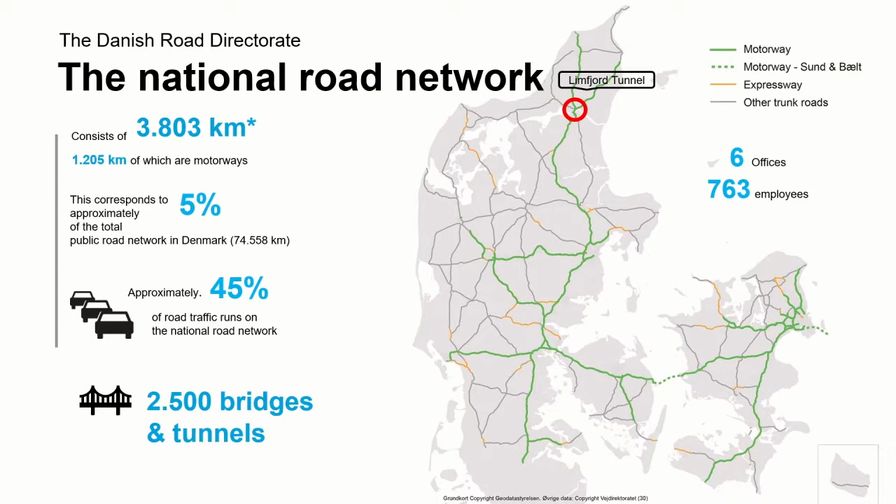Now here we are in the Limfjord tunnel. It was constructed from 1965 to 1969, located in the northern part of Denmark. It's part of the Trans-European road network, and it's a very important connection for traffic to Norway and Sweden. It's an immersed tunnel, 582 meters long, divided into 2 tubes. Each tube is 12 meters wide with 3 lanes each.

Since its construction and opening 50 years ago, the traffic has increased from 29,000 to almost 100,000 cars today, so it's a high use factor. During the 50 years of operation, the tunnel has been equipped with a lot of mechanical and electrical systems, and appears today as a fully automated tunnel. It is operated 24 hours with an emergency preparedness.

If and when we have a failure, the O&M contractor is reached through an SMS, and furthermore it's monitored from the local police station, wherefrom you also can launch restrictions.

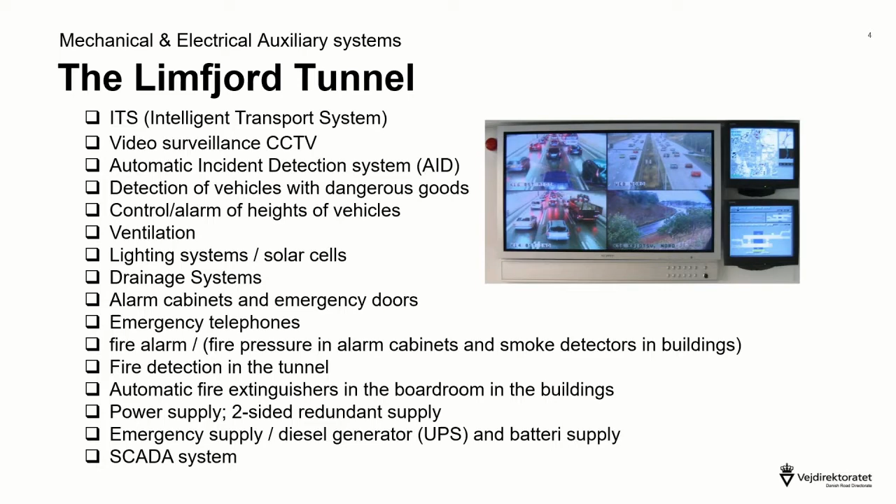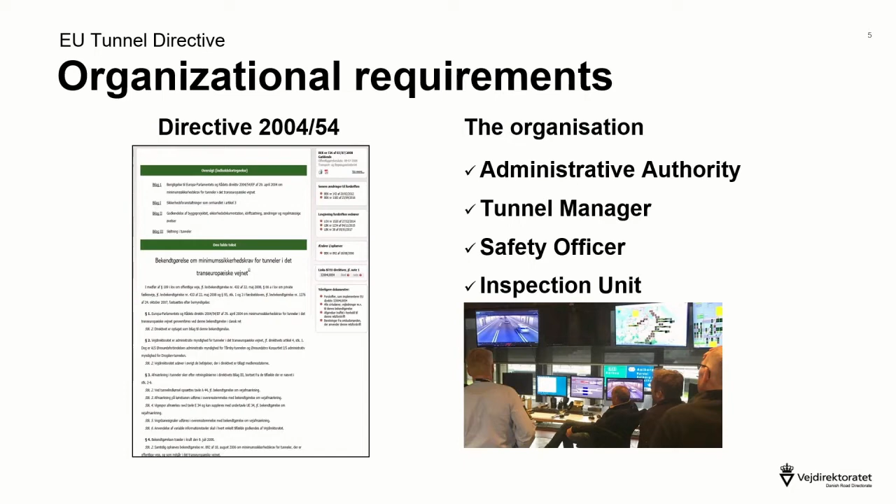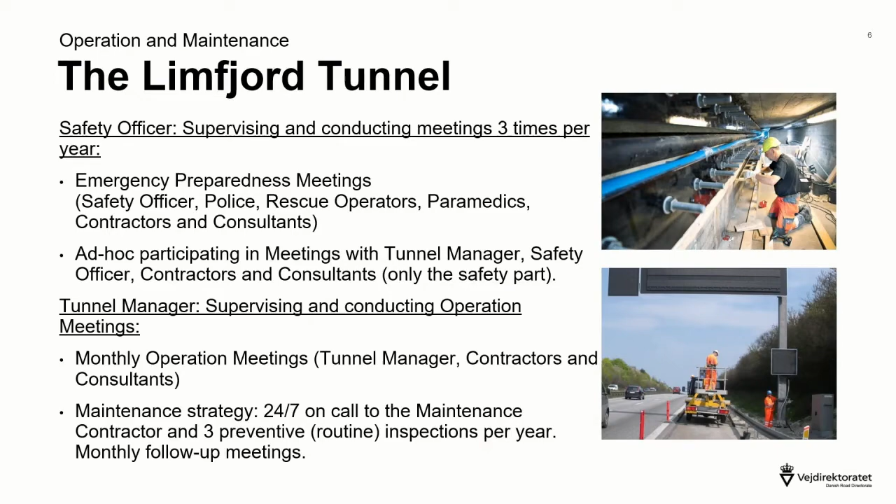We have adapted our organization to the requirements of the EU Tunnel Directive. We have an administrative authority and a tunnel manager, a safety officer, and of course also an inspection unit. I think this is very familiar to all of you. The tunnel manager and the safety officer are actually key figures in the safe operation of the tunnel. They lead and coordinate the various tasks, emergency preparedness, conduct meetings with police, consulting engineers, suppliers, and contractors, and of course hold the required full-scale exercises as required in the directive.

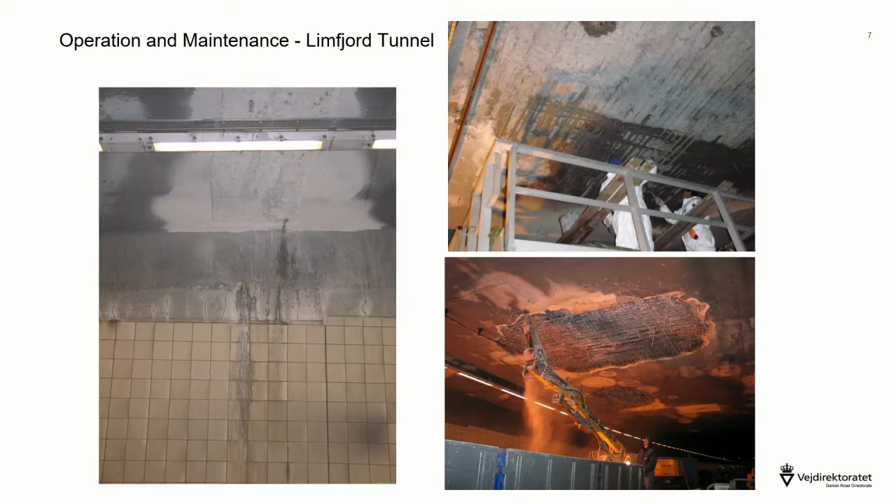Since the tunnel opening in 1969, we had a lot of leakages and cracks were observed, and we soon realized that the so-called waterproof membrane of the tunnel was not functioning properly. We got seawater leaking in through the cracks. Settlements and cracks have been the main reasons for a lot of repairs, and this has been a challenge due to the traffic in the tunnel.

Here we can see repair of tunnel ceilings by drilling stainless steel linings and mounting clamps, anchors, and nuts up in the roof. After that, it has been covered with fire protection. This is pictured from the rehabilitation. It has been complicated because we have to carry this out through the night, since during the day we have peaks in the morning hours and the evening hours. So it's very, very expensive to run these operations with a tunnel in service.

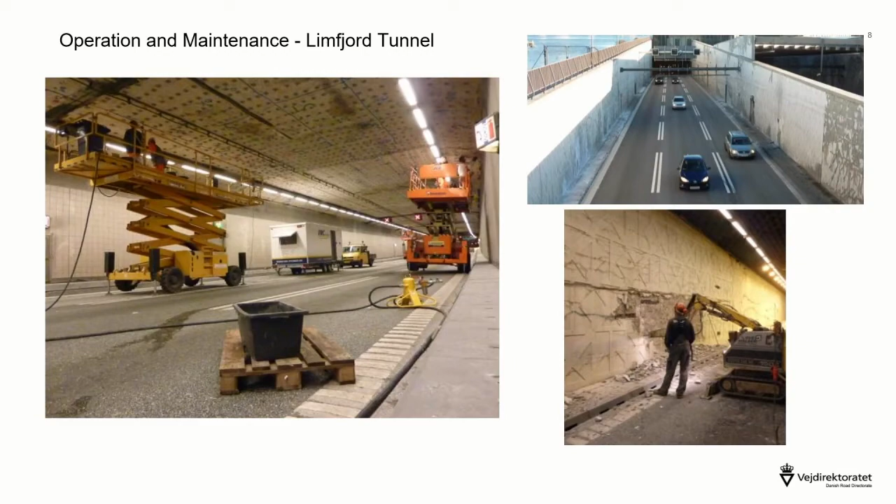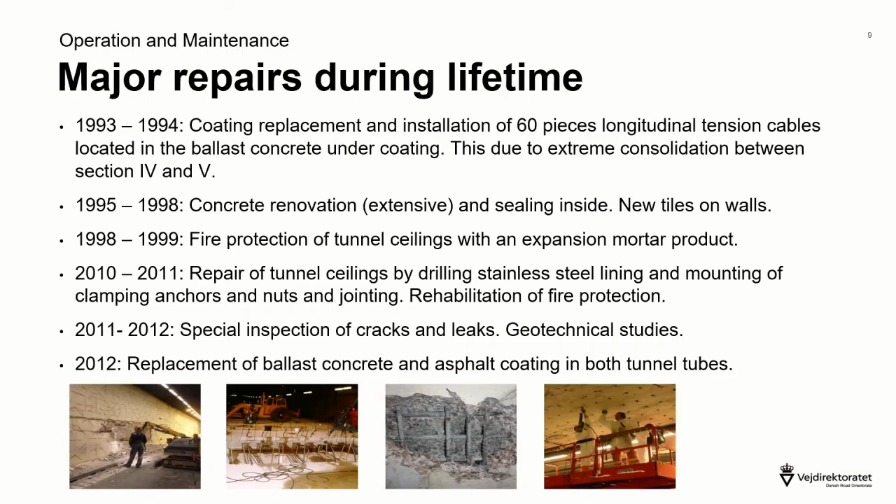Now let's go to the structural health assessment and see what was the main reason that we set down the expert group.

We see here the cost of operating the tunnel through the years. The lower curve is the expected accumulated cost for operation and maintenance of the tunnel. The upper curve is the additional cost for the repairs, and you can see some big jumps: concrete repairs, joints, coating replacements. So in general, we can just conclude that operating and maintaining a tunnel is much more expensive than a bridge normally.

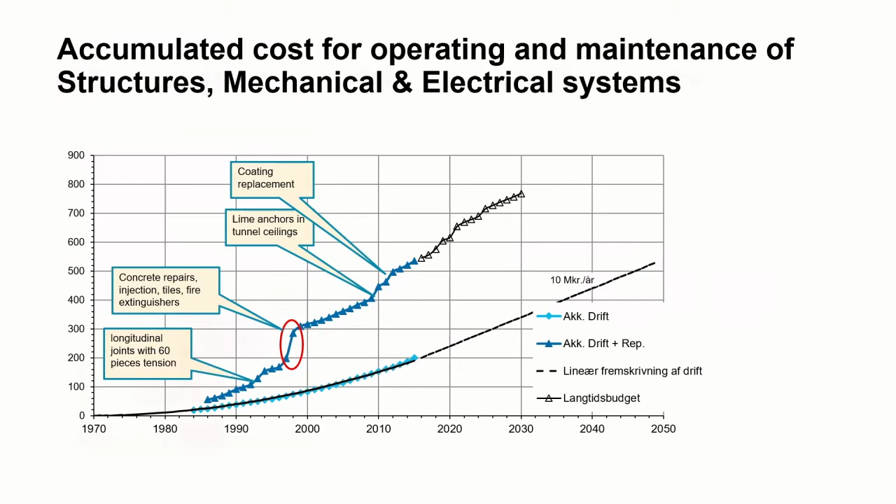What really made our concern was the settlements. Since the opening, we have been measuring the settlements, and you see here a picture of the recorded settlements. You have to the left Aalborg, the southern end, and you can see there are severe settlements in the northern end of the tunnel.

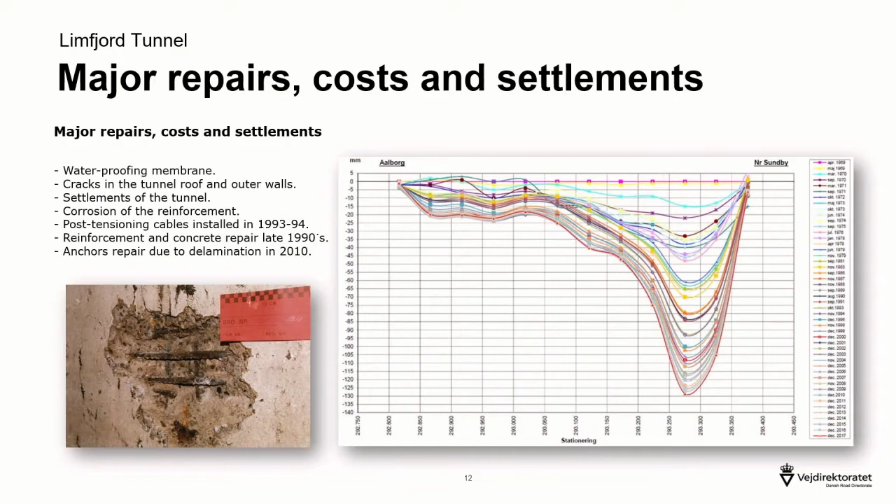The reason for that was when the tunnel was immersed or constructed, a lot of the ground was replaced by sand fill. So we have some very extraordinary geological conditions up there.

Another reason for setting down the expert group was what you see here. This is the result of seawater dripping into the tunnel. So repair works, rising costs, settlements, and especially this dripping has been a major concern.

A lot of our customers with cars, when they've been driving through the tunnel, they could see water dripping from the roof, and they could taste the water. Yes, it was salt water. So our tunnel manager, he quite often had to explain the current situation in newspapers and televisions.

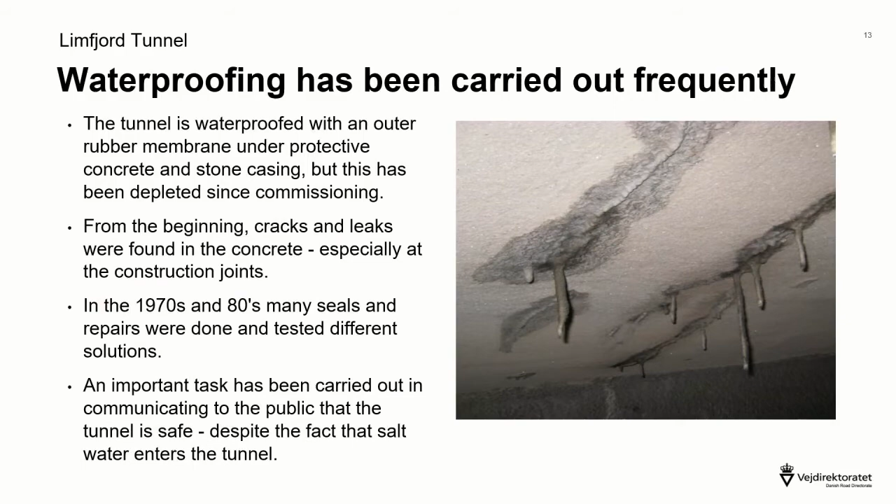Yes, it is seawater. You don't have to worry. It's to stop and say, do we have a problem? Is the tunnel safe? Or for how long is it safe?

So in 2016 to 17, the settlements reached a level where we couldn't wait anymore. So we have to do something. So we actually settled an expert group, or selected a group carefully.

International, we found a lot of experts. They have something in common: they were very, very bright. They could all write best in class on their curriculum vitae, and we brought those people together.

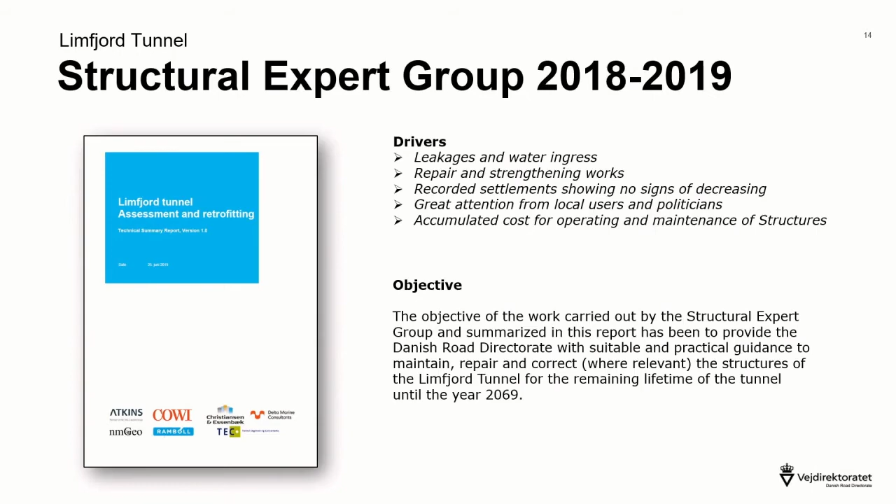The way we worked, we set down the geotechnical expert group first to verify the geotechnical conditions. And then we followed up by the structural expert group, and the structural group was followed by the geotechnical group the whole way. So we had a meeting where we explained the result from the geotechnical group to the structural group. Had a very, very pleasant meeting, site visit to the tunnel, where after we had a brainstorm on how we're going to solve this.

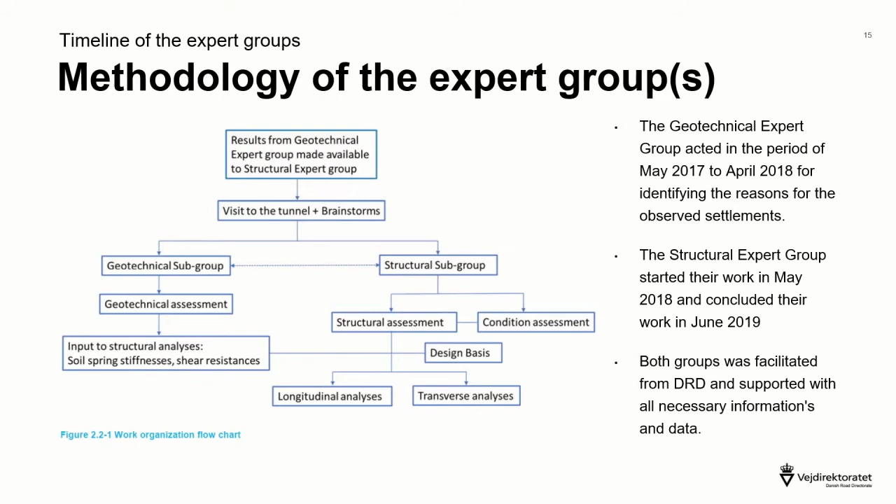So we organized the two parallel groups, and we followed this, or facilitated the group very, very intensely. I could say they worked brilliantly together. People from Germany, Holland, England, and Denmark. So it was really a pleasure to follow.

The conditions assessment was fortunately that the tunnel was in a much better condition than we feared or expected. And you can see some of the main results here. However, the expert group strongly recommended us to keep the tunnel under increased observation with a high degree of monitoring, so we could follow the exposure to the water penetration and the chloride content of the construction.

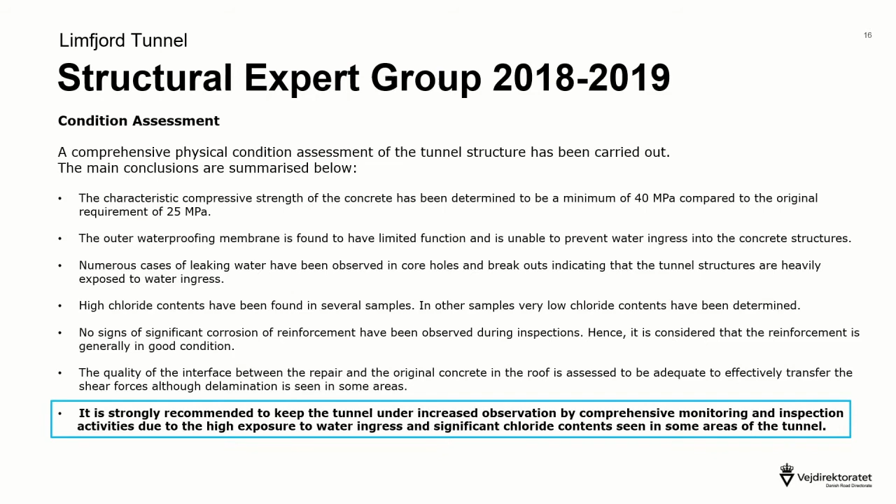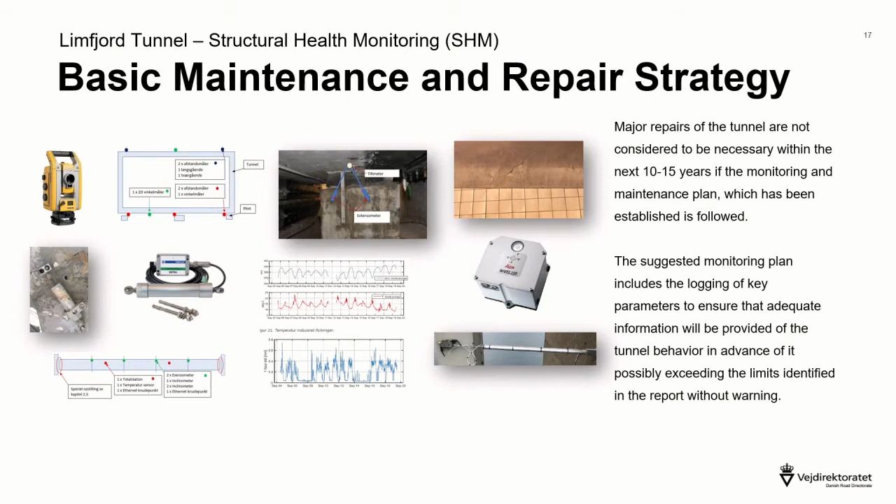So all this has been followed by a structural health monitoring program, which we are setting up at the moment. And we are installing a large number of measuring equipment and measurements. And these measurements are going to continuously provide us with the information, so we can be able to assess the tunnel.

The expert group came up with some very, very good proposals for when to do something more significant than just the ordinary maintenance. We have a plan for an additional pre-stressing project within 15 years' time, you can see it up in the right end of my presentation. The blue lines are where we can install additional pre-stressing.

There's a project for replacing the bearing blocks in the northern end. You can see a picture of the bearing block there, and you can see it's influenced very much by the extensions of the tunnel. The tunnel moves all the time and is getting longer because all the cracks are filled with small parts of soil, so it's getting longer and longer every day.

And the biggest retrofitting project is active horizontal compensation grouting, scheduled for year 2064. It's a very exciting program: installation of a big cofferdam and some horizontal grouting under the tunnel in order to lift the tunnel.

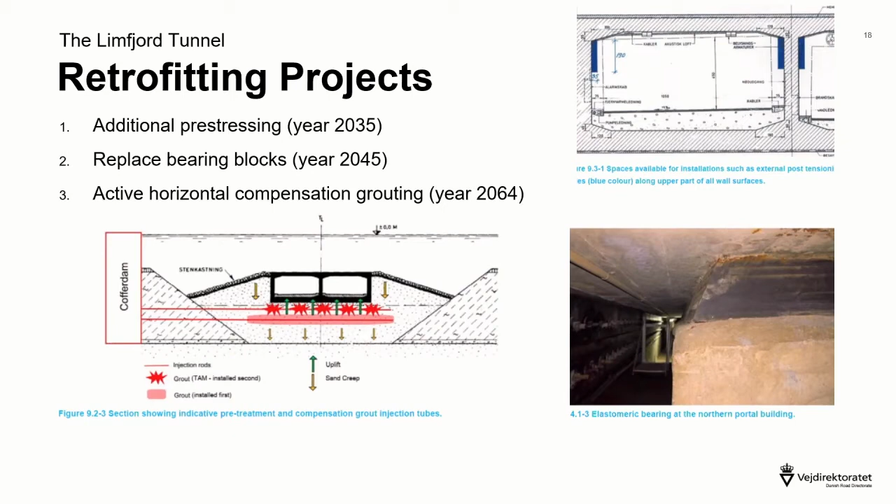All this ended up with a plan for the next 50 years. So this is our maintenance plan. We will continue our basic operation, and we will continue our structural health monitoring. In the basic operation, we will of course also update the structural health assessment plans regularly, because this is a look into the future, and it might change. There's a lot of things that can come in, but we will frequently update the assessments as well. And then we are ready for the major repairs.

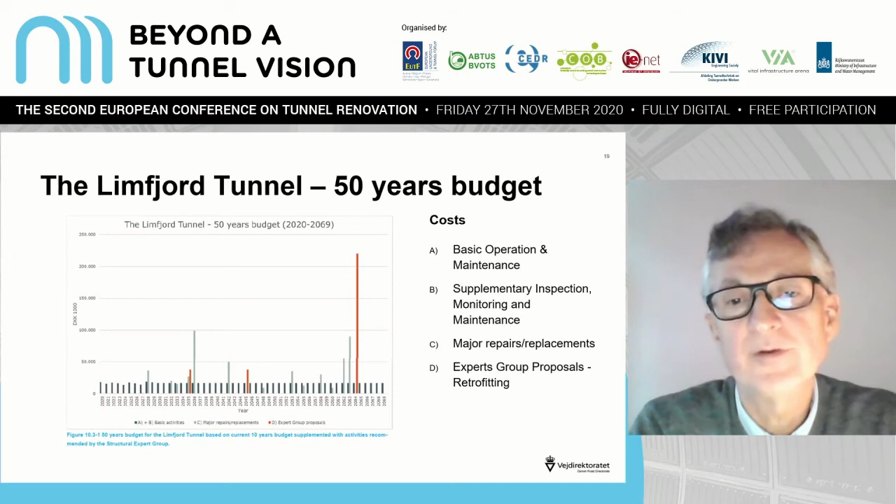Well, thank you very much, Niels, for your excellent and technical presentation. I don't have any questions on my screen, but I have a question for you. I saw that you did compensation grouting. Was it already performed, or is it still to be done? No, it's to be done in 40 years' time, in 2064.

Okay, but still then I saw quite some works that were done on the civil structure. And I asked myself, these experts which you involved, did you give them a boundary condition for doing the maintenance works? Because this is not a new tunnel, it's a tunnel in use, and of course traffic should flow and availability is key. How did you manage that in your expert group? Because when they say well, this needs to be done, the working methods can be important in this respect.

Yeah, one thing I didn't mention was the planning, because we have plans for an additional connection up in the north, and the timing is that we will install the next connection before we are doing the retrofitting project. So there was, if I understand correctly, a time slot in which the works needed to be done. The idea was to keep the tunnel in operation for at least 10 more years before we are doing something.